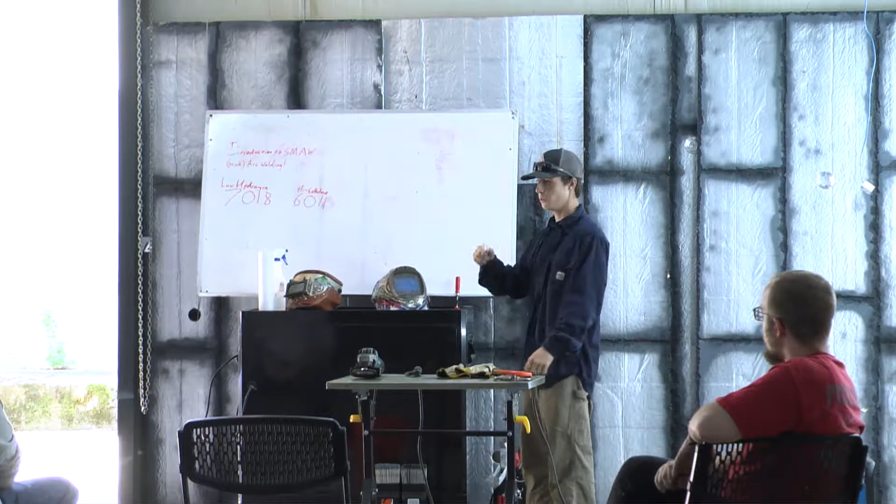But today we're just going to get you started on the most basic thing I can teach you, which is SMAW, also known as stick. So SMAW stands for Shielded Metal Arc Weld. SMAW is the oldest process of welding that uses an electrical arc.

There's welding throughout history. Blacksmithing is a form of welding, forge welding. So if you get like Damascus steel that's been folded and pounded up on each other in layers, that's a form of welding. But welding has evolved to where we use an electrical arc. So, SMAW, shielded metal arc welding.

The reason they call it shielded metal arc welding is because of this electrode. As you can see, you have a metal core and then this powder on the outside. This powder is called flux. As this rod burns, this flux turns into a gas and shields your molten metal from the air we breathe. It doesn't like it. It causes porosity, which is pinholes in the weld, and it can cause all kinds of defects.

And then it also turns into a slag, which is almost like a ceramic feeling coating on top of the weld that you actually have to break off. So you have two forms of shielding: the flux that turns into a gas and your slag. So that's SMAW in a crash course.

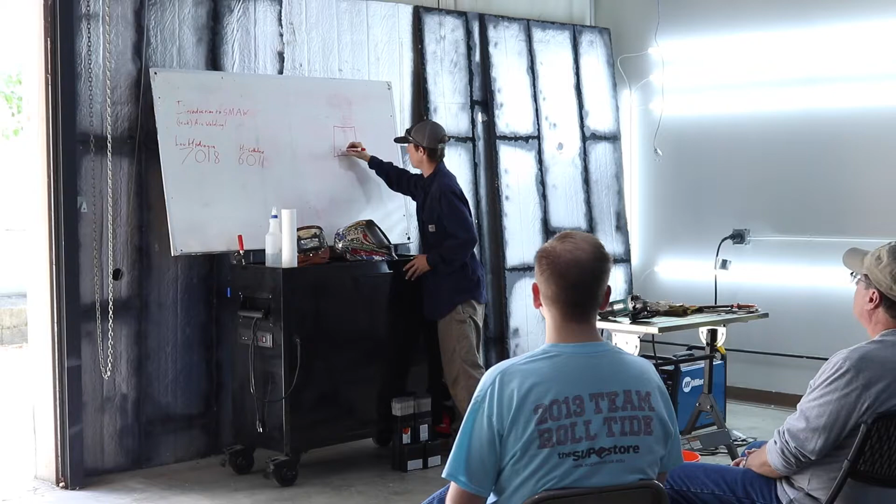Let's talk about polarity for a second. Usually you'll see a positive and a negative on the machine. Mine just says work for the negative, which is your ground, and I think it says TIG stick for the positive, which is your actual electrode. So let me draw a little something. This is our welding machine, okay? We'll have a negative and a positive, and this is our workpiece.

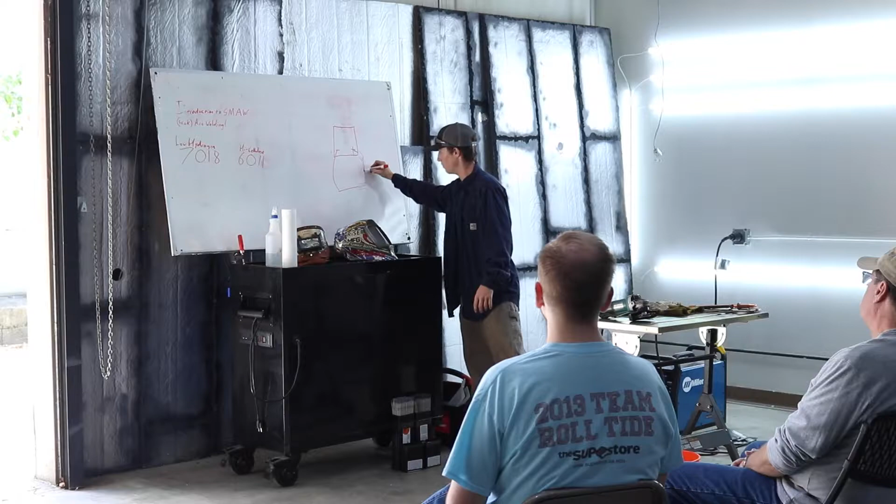Our ground will be hooked to the workpiece. And then our electrode, which will be coming out of the positive side, is what our rod is going to be held with, which is this. People will also call this a stinger. It's just a slang term. But you'll literally clamp this on your rod, and that is how you're going to deposit metal onto your workpiece.

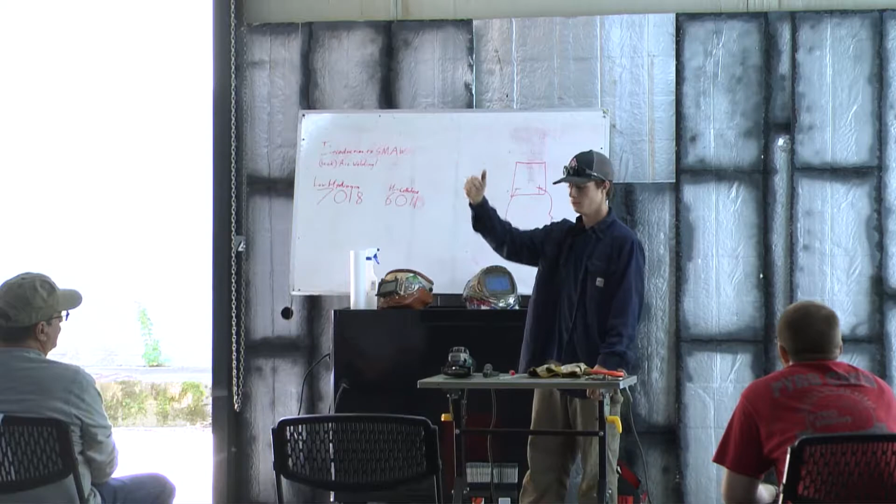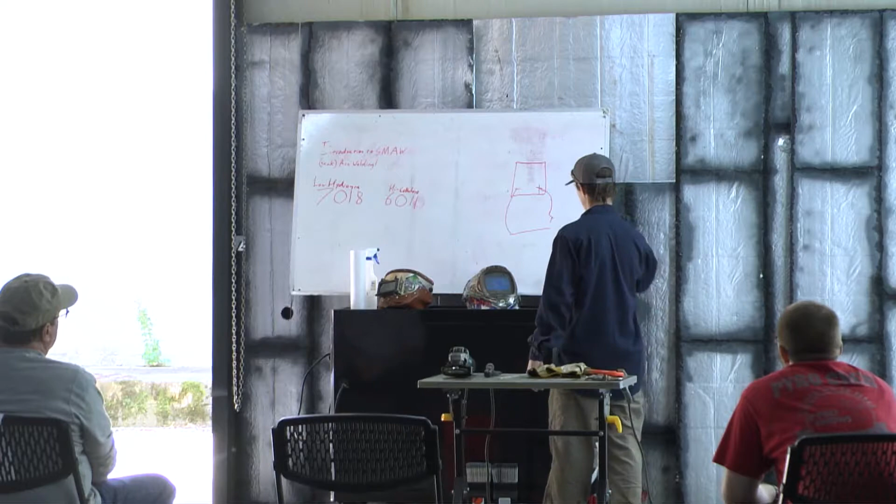This welding current can travel hundreds of yards. So if we were on a construction project, like up in scaffolding, I could clamp this at the bottom, climb up 3 stories, bring this with me and still get flow. It goes far, especially with stick welding. So this polarity is called reverse polarity, and that's important.

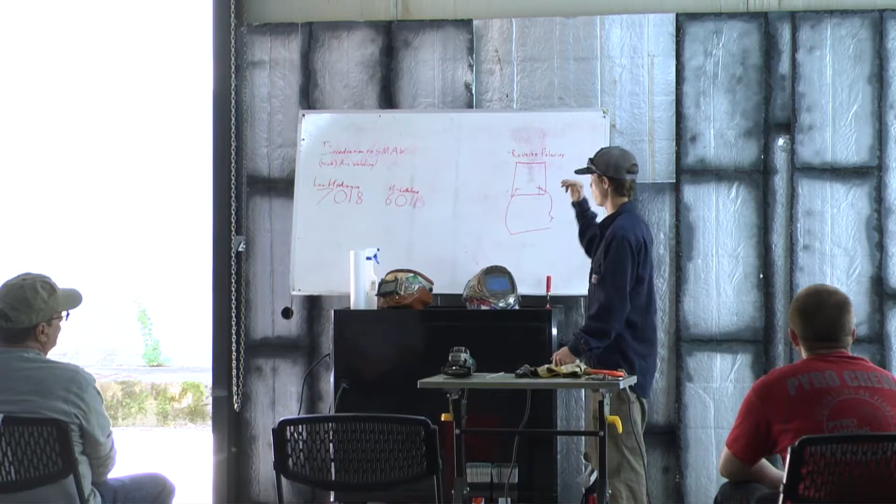Because you'd think that our electricity is flowing from our stinger to our workpiece, but it's actually the opposite way. Our electricity is flowing from our workpiece to our rod. So that causes the transfer of metal back to it. The technical term is globular transfer. If you look at it under a microscope, it's tiny little droplets falling into the molten puddle. So that's polarity.

So let's talk about our rods. This rod I've been showing y'all is what's called a 7018. There's thousands of different kinds of rods, but the two most common and what y'all need to have in y'all's toolbox is a 7018 or a 6010 or 6011. 6010 and 6011 are about the same rod. 6011 is a little newer, and that's what we're going to be using today. So why are they numbered? I'll go over that number scheme real quick.

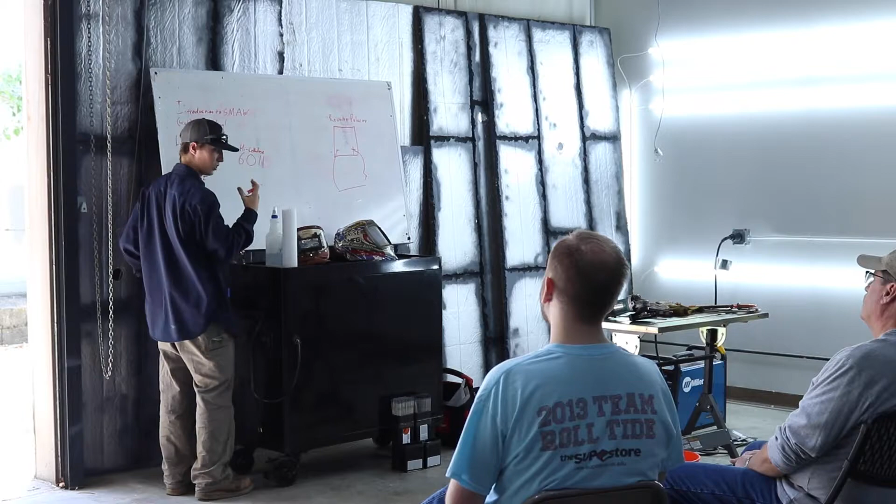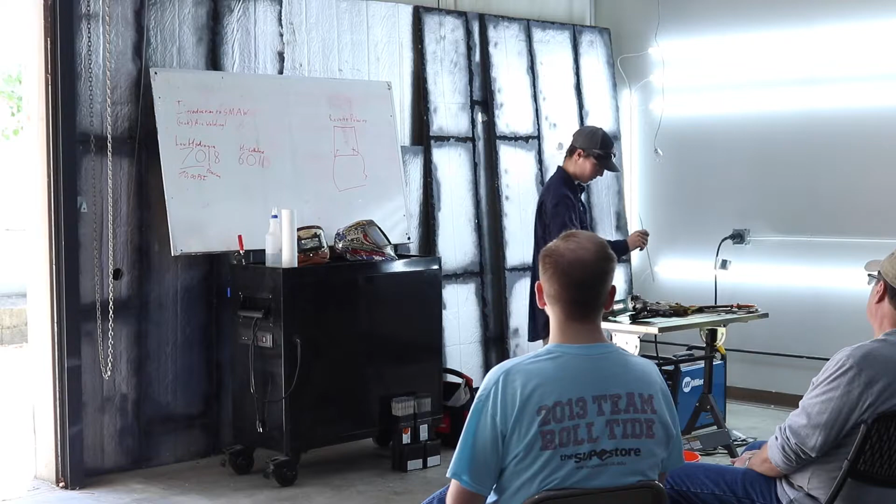The 70 is our tensile strength. The 70 in 7018 stands for 70,000 PSI. The 1 stands for our position of the rod, and that would mean with this rod, I can weld flat, horizontal, vertical, and upside down. There's some rods like a jet rod, which is a 7024, that you can only do horizontal and flat because it puts down so much metal that if you tried to weld overhead, it'd just drip.

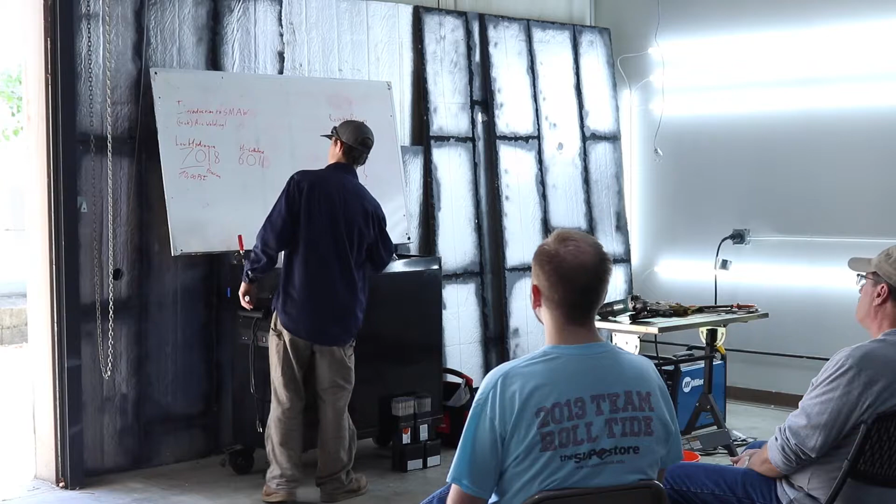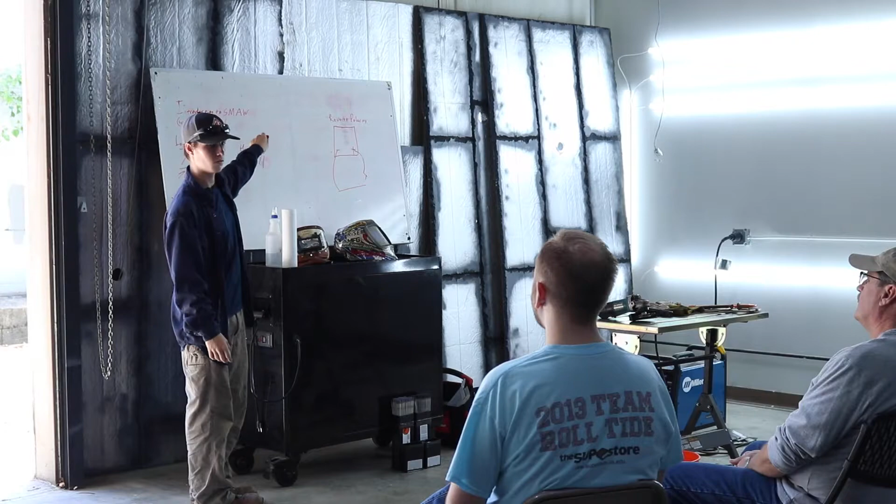It wouldn't actually stick. So the 1 stands for flat, the 2 stands for horizontal, the 3 is vertical, and 4 is overhead. So if it has a 1, that means it's all position. You'll never really see a 30 something; I've never seen that personally. You'll just see a 7024 or something other than 20, and that just tells you do not try to do this where it's not going to have gravity helping it stick.

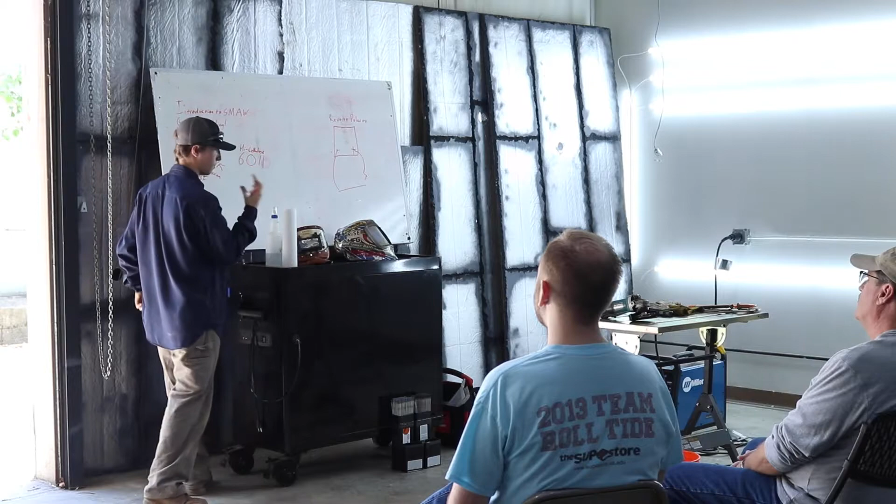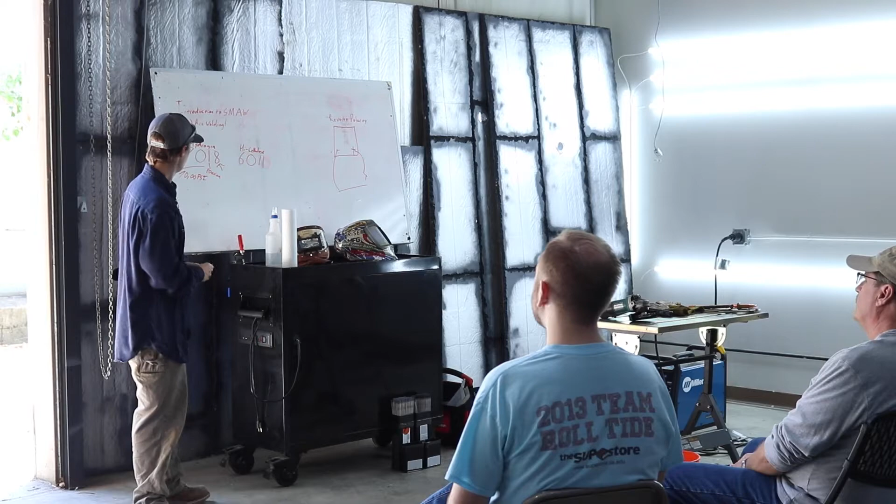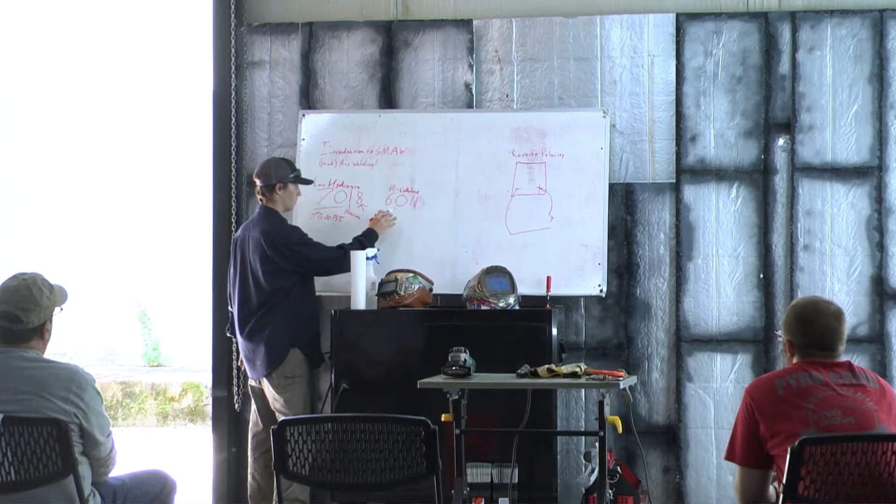And then the 8 at the end is your composition. That tells you what it's made of, like for example 5% chromium, 2% nickel, etc. There's a chart you can find that goes over all the ingredients in a rod, but that tells you the characteristics of what the rod is going to do. The same thing applies to the 60 series rod, but you notice there's a difference in tensile strength.

A 7018 is what in the industry they call a low-high rod. That means low hydrogen. So what does low hydrogen mean? Hydrogen is water molecules. So when you store these on a job site, you have to keep them in an oven, because if this gets any kind of moisture in it, it's pretty much done for.

The 7018's application is a structural supporting rod. So say, hanging an I-beam somewhere, building a skyscraper, 7018 is what they're going to use. Or they're going to use flux core, which is 7018, but in a continuous wire form. Okay.

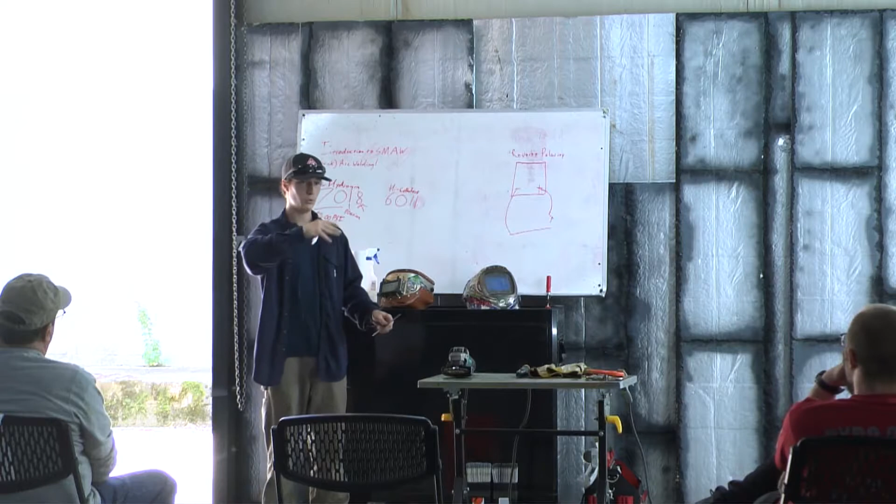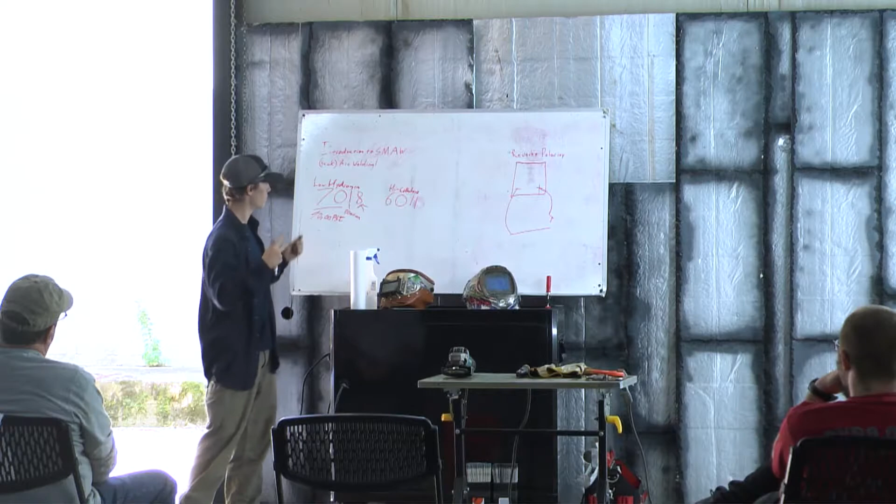So high cellulose, which is a 6011 or a 6010. And as I said, today we're using 6011. So as this burns, you'll smell kind of a wood paper product kind of burn smell. And that's because it has cellulose in it, which is wood parts. So the high cellulose is more focused on penetration.

So usually, say we had a lawnmower deck that was ripped or something, and you had a gap, you could take this 6011 and bridge the gap with it, and then go back over with a 7018 to reinforce it. So with a 7018, your metal needs to be pretty clean. Like with this metal, we have what's called mill scale on it, which is this gray kind of stuff, and that's just for storing to prevent corrosion.

So 7018 and 6011, most stick rods can burn right through that mill scale. And 7018 can handle rust, and you're really not supposed to, but it can handle rust, it can handle some dirt, it can handle some grease. But 6011 can? Yeah, 6011 will blow right through rust. So it's more like a general purpose? Yeah, so 6011 is your classic good old boy farm rod. 6011 is like if you go to your grandpa's welding shop, he'll have 6011. You didn't have to have any special storage?

Not for 6011. For 7018, especially for what you guys will be doing, you do not have to keep 7018 in an oven. Just keep it in a dry place, like put it in a Ziploc bag and make sure all the air is out of it. That's what I do with mine at home. I don't have an oven at home, but up at the college and places I've worked at, we did keep it in the oven because a lot of it was X-rayed and non-destructively tested.

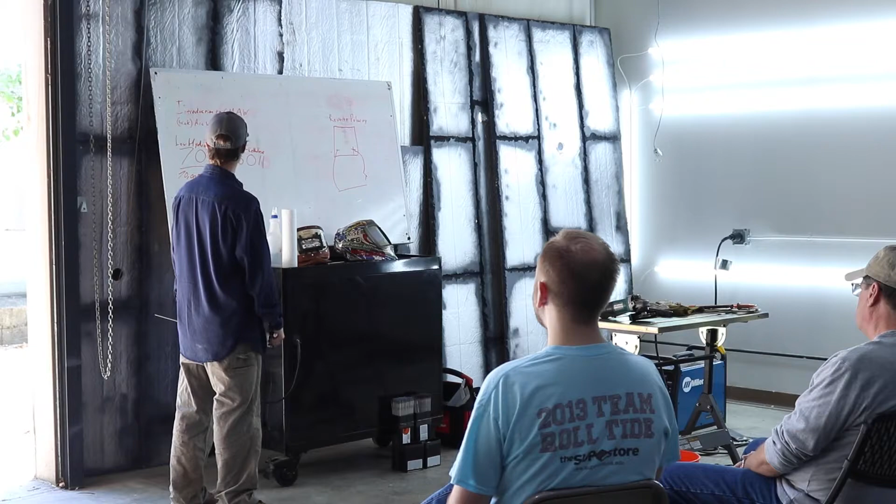So on the 7018, let's say you're keeping it at home, but you want to use it, is it a good idea, prior to using it, to stick it in the oven to dry it out? You could. I don't. If one gets wet, this flux will literally feel gummy. It's not just actually getting it wet. It's humidity. It's impregnating humidity into it. It'll absorb it from the atmosphere.

So, just a quick recap. We're going to be going over SMAW welding today, which is also known as stick. I was going over the polarity stuff and the two rods we're going to be using, but I can go over that more individually with you later on. Dumb question. As far as the flux is concerned, are all fluxes the same? They're not. That's a really good question. So that is a perfect segue into my next bit.

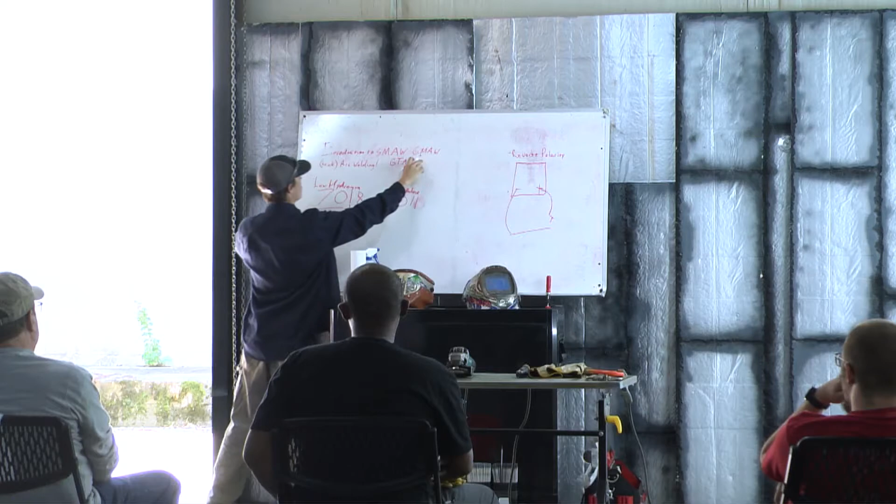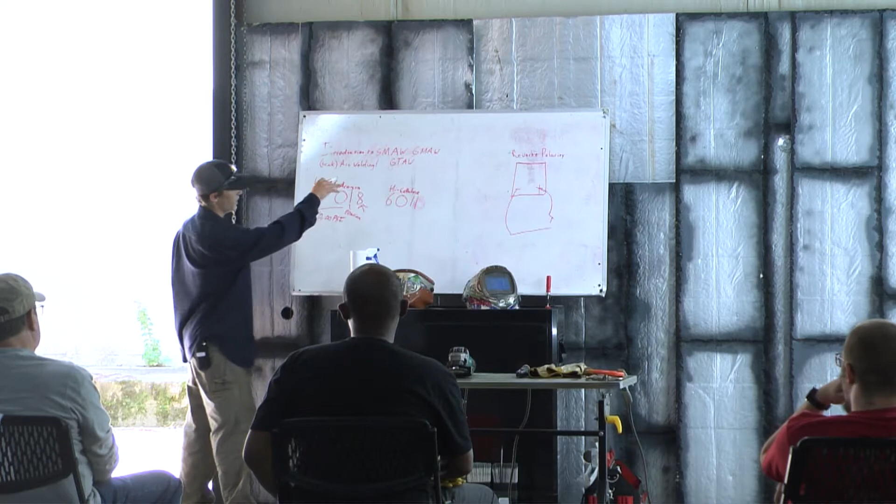So there's three main welding processes. There's SMAW, GMAW, and GTAW. So shielded metal arc welding, gas metal arc welding, gas tungsten arc welding. Okay, so the GMAW is MIG. So you're using shielding gas, unlike stick, where you don't have to have one because that flux turns into your gas.

The GTAW is TIG. TIG is mostly what my background was in the industry. You actually have a small torch and a piece of tungsten. And the reason we use tungsten is because it has an extremely high melting point. So you have argon gas that comes out and the electrical arc from the tungsten ionizes that argon and creates a plasma that burns at about 12,000 degrees. So you can get extremely precise.

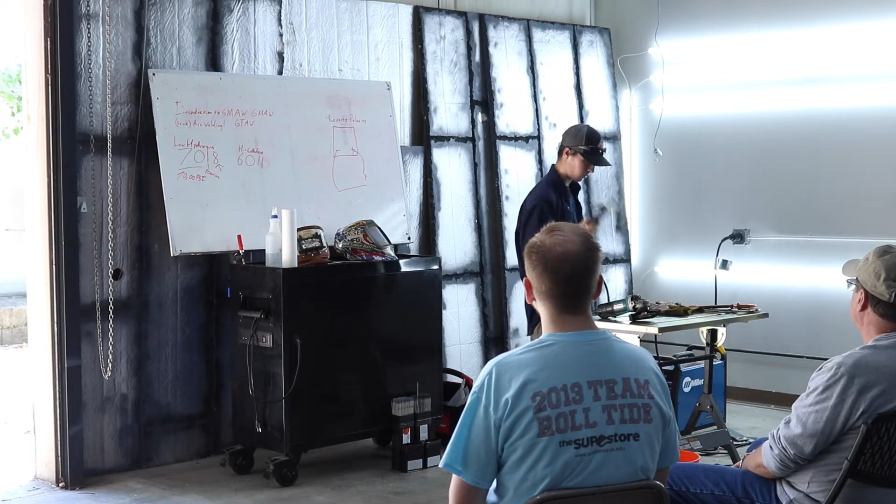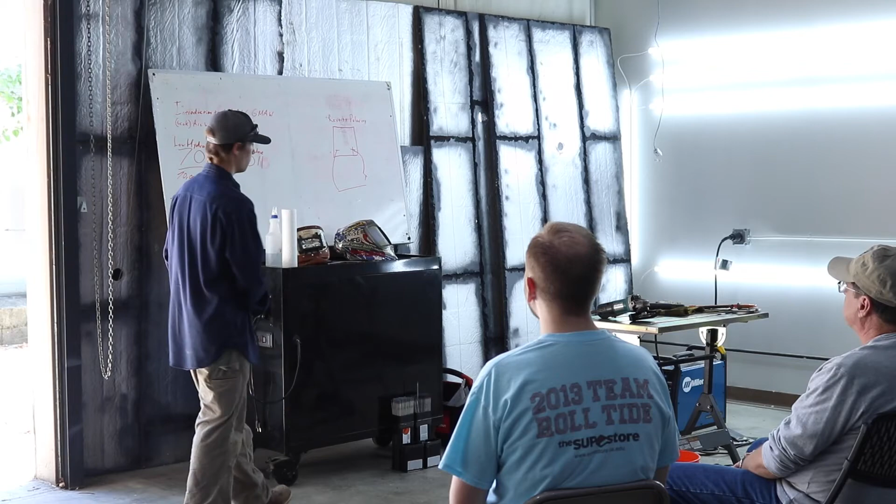And another thing with TIG, your polarity is reversed. So it's actually straight polarity. So your electricity is traveling from your electrode to your workpiece. So you have a more focused heat affected zone, okay? And then with MIG, you said you've done MIG before. Yep. And you've done spool gun, which is very similar.

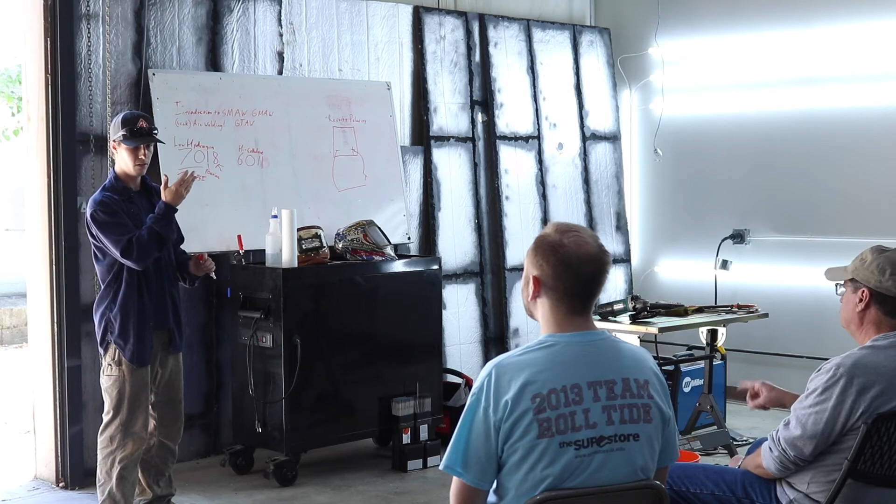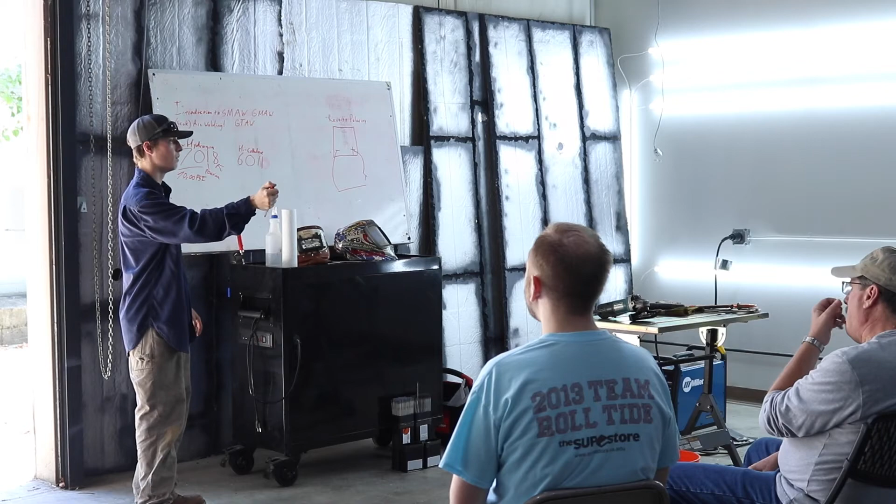So you have a wire drive that comes through a gun, and usually when you're talking about MIG, you're talking about short circuit MIG. There's all kinds of different kinds. There's spray transfer, globular transfer, on and on. But for you guys, if you do more research, focus on short circuit MIG, because that's the most common. The gas you use with that is 75-25, so it'll be 75% argon, 25% carbon dioxide. That may be flip-flopped, but it's one of the two.

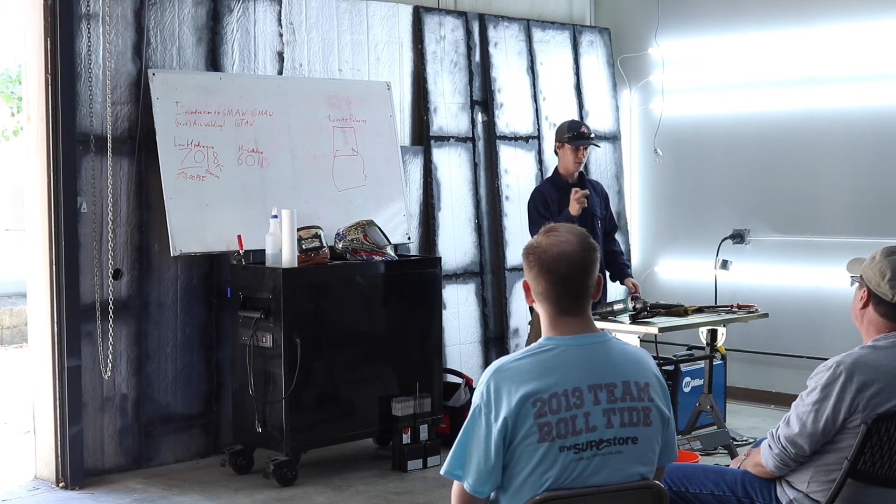What does the gas do for you? I know in MIG it's to protect the metal and protect the rod. So because it's an inert gas, it's a little heavier than our atmosphere. So it displaces our atmosphere. I'm no chemist, but because of the way our atmosphere is, hydrogen, oxygen, whatever, it impregnates itself into that molten metal and stays there as it cools. So by the time it cools, you have pinholes all through it.

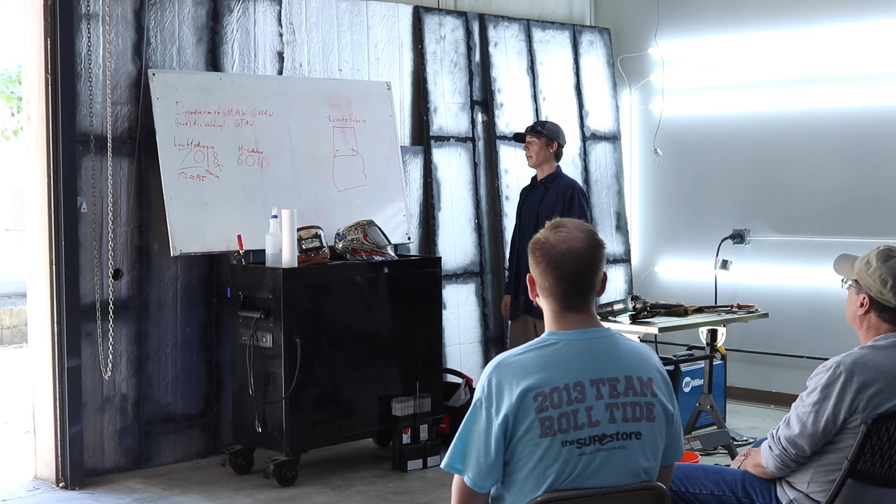You can also have what's called worm tracks, which are little grooves. It's a defect. It makes your weld very brittle. But that's why we use inert gas. There's all kinds of different kinds. There's artificial ones like Stargon, but most commonly you'll see 100% argon and 75-25. So, I think that pretty much covers our basics. Are there any questions on that?